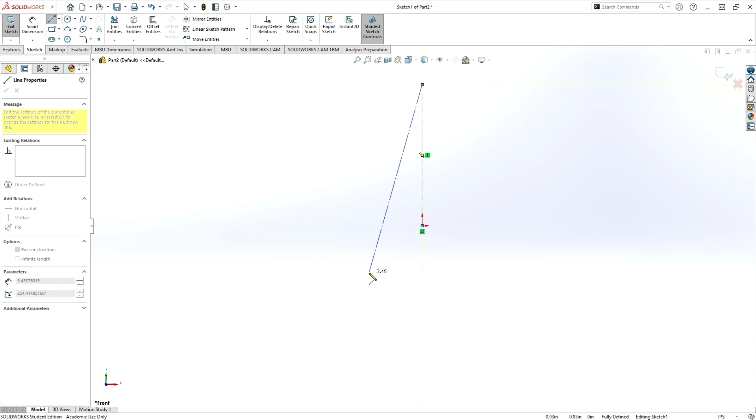And we're going to create a center line since we're doing a revolve. Okay, up. And I'm going to select on that center line and I'm going to make it infinite length. Now I'm going to start drawing my shape. So I start at origin so I can anchor it. Go to the left, up, angle, up, back to center line, and then back to origin. I now have the basic shape.

Alright, we know that this is a 45-degree angle. So let's go ahead and constrain that at 45 degrees. Okay, so any dimensions we apply on it, at least that dimension's already configured. Alright, let's go back to our drawing. What are we going to do next? So we need diameters and overall height. Let's do the overall height first. That'll get it proportionally. So it is 430 thousandths to 2 decimal points.

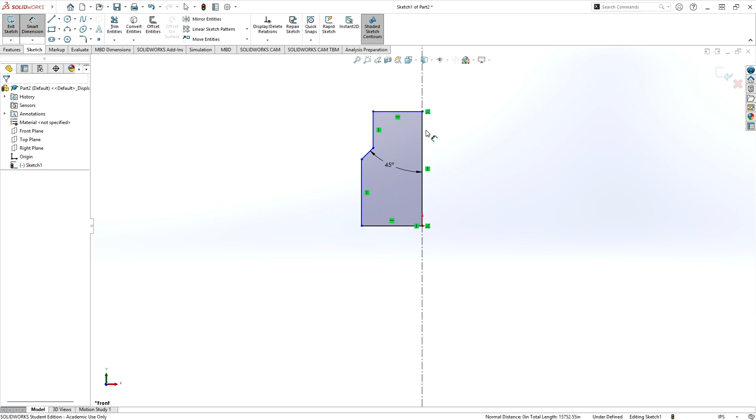So we're going to take our dimension tool, we're going to grab our line. Hit OK on the previous dimension. We're going to hit our vertical line. Let's hit escape. Let's try that again. And we get our vertical line, pull over, and it's 0.43. Okay, now in my case, I ended up drawing my part much taller than 0.43, so not a problem. This is still constrained at 45.

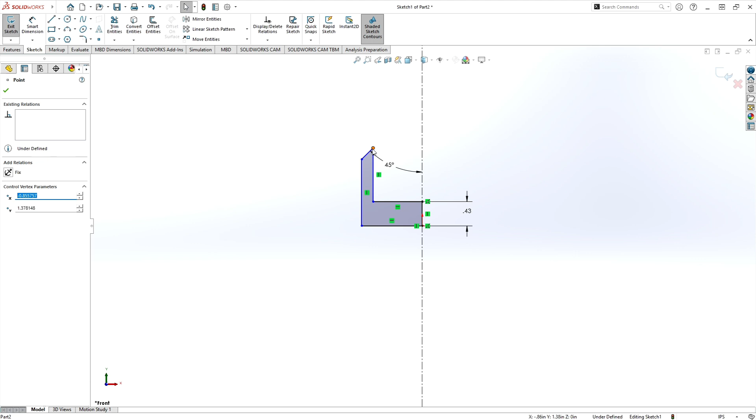You might or might not have this happen, but I'm going to drag this 45 down so that it's at the right height. Now when we start applying the other heights on it, it'll correct itself. Okay, so in our diameters. Okay, so let's stick with heights. I'm going to go to the next height. We've got 130 thousandths from the top down to the top of the chamfer.

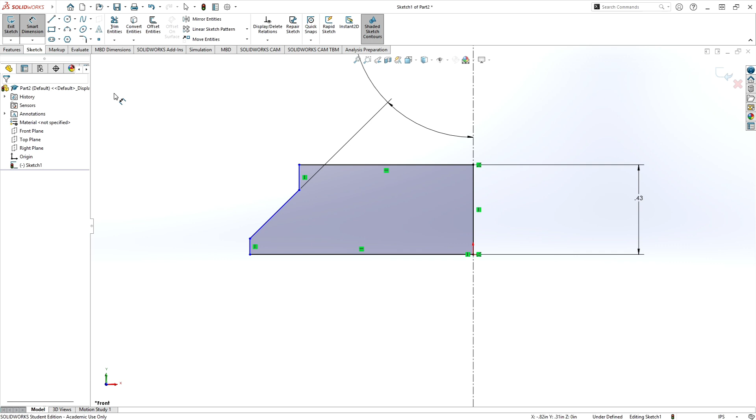Okay, so we're going to go to dimension. We're going to grab the length we want, and it's 0.13. It's actually pretty close. What is really off right now is our diameters. Okay, we have diameters to put in. Okay, so our first diameter, if we go back to our drawing, is 194 to 197.

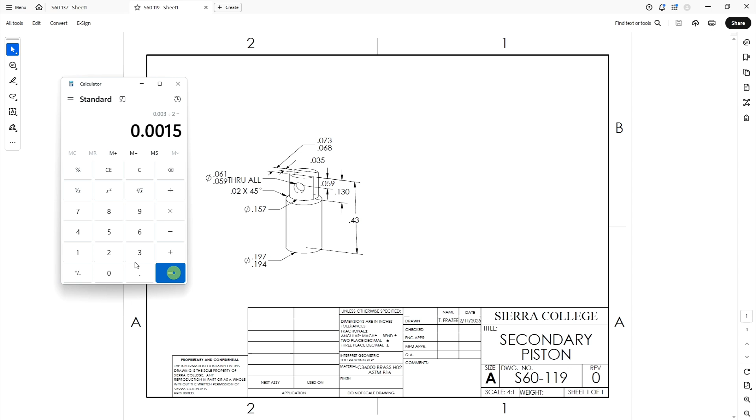Okay, so again, to get that number, we're going to go to our handy calculator, and we're going to put in 0.197, and we're going to subtract 0.194, and that's going to give us the range of our tolerance, 3 thousandths. We're going to divide that by 2. So we have a 1.5 thou difference between the bottom and the top of this tolerance.

We're going to add it to the bottom of the tolerance, which is 0.194, and it gives us this number, 0.1955, or 195 and 5/10 thousandths. We're going to copy that number. We're going to go back to SolidWorks.

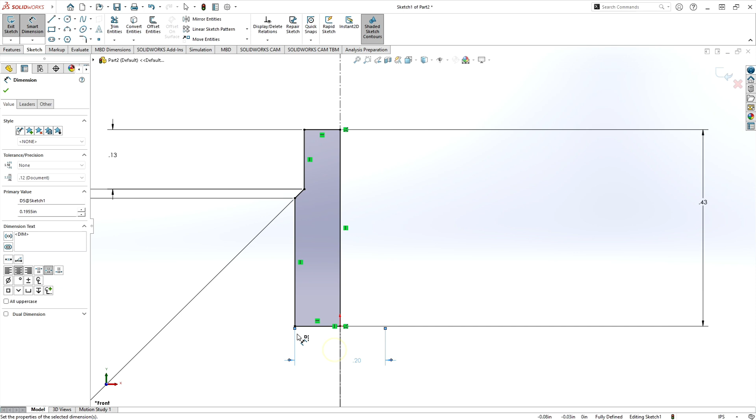We're going to go and do a dimension from center line, not from the line, from center line to the outside diameter, and when we drag it to the right of the center line, we should get a diameter, and we can paste that number in there. Now, this might shrink a lot, so let's hit OK. Okay, and now we're going to do our other diameter.

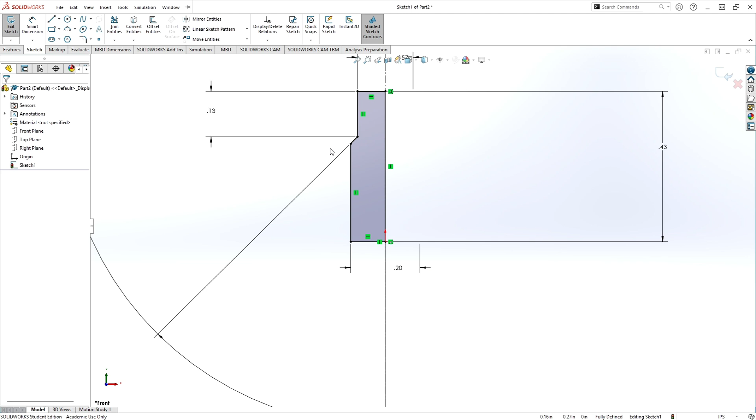It's going to be the small one to the center line, drag to the right. It's 0.157. Hit enter, and we want to make sure we go to 3 decimal points in there. Now your drawing references a distance from this point to this point of 20 thousandths. It's within the tolerance stack. This tighter tolerance is more important. So you might get a conflict if you try to dimension both. So the drawing really should have the 20 thousandths as a reference and just put the angle on there.

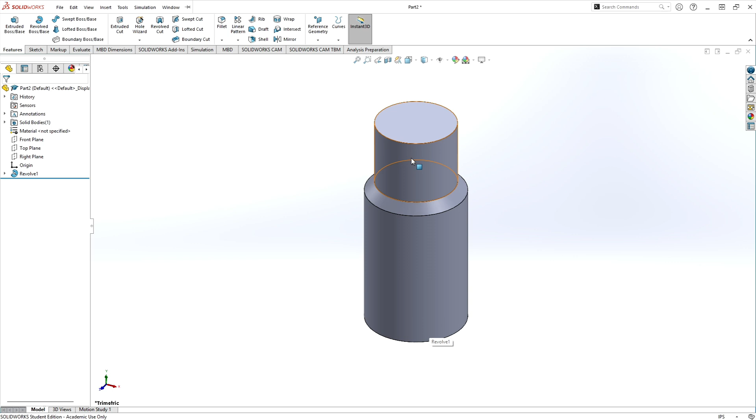All right, we're going to exit this sketch, and then we're going to go to features, and we're going to do a revolve base. There's our primary feature that we're starting with, and we hit OK. And again, I don't care how you arrive at this. If you want to extrude a cylinder, do a taper, then extrude another cylinder, as long as the end result's the same. Okay, now let's look at our drawing. We have a hole and a notch to put in. Let's put in the notch first.

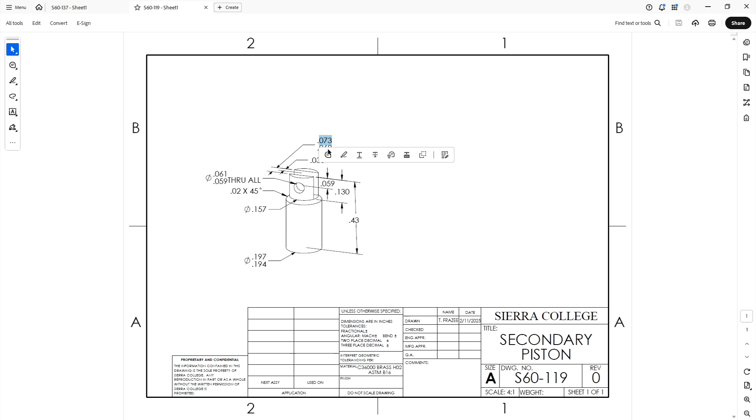So if we look at the dimensions for the notch, it's got a center line, so you don't want to imply it's on center line unless it's called out that way. So it's 35 thousandths, and then the median of the tolerance should be also 35 thousandths, or it should be 70 thousandths in between here and here. So let's go draw our slot. There's a couple ways you can approach this.

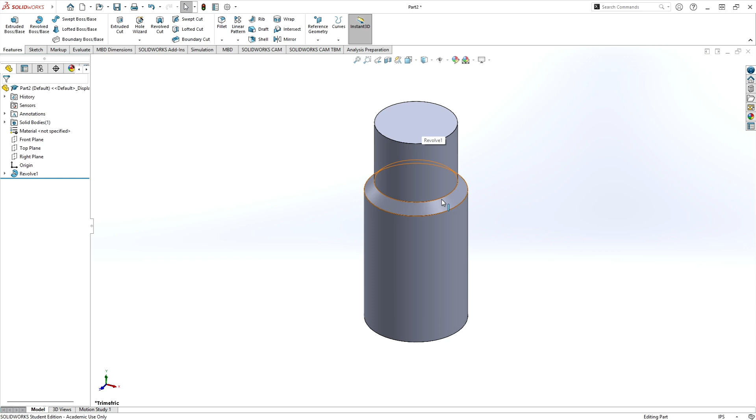You can either draw the slot on the top and cut down to the cylinder, or you can cut it in the side view and cut it in both directions. I'm going to draw it from the top. We're going to go to sketch. We're going to pick on the sketch tool. We're going to pick on the top of the model, that's what we're drawing on. Now we're going to draw a line.

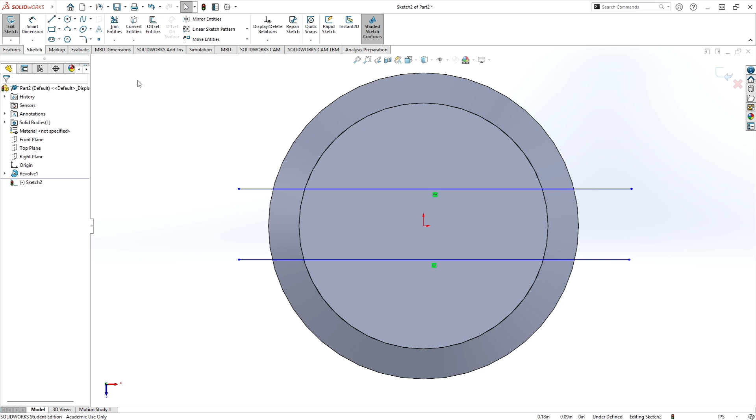Okay, and then we're going to hit escape, and then we're going to draw another line parallel to that. If you get the relationship right, the horizontal should already be there. And then we're going to do what's called a convert entities. This allows us to pick on an edge of the part and project it on the plane we're working on. So I've now got the edge projected on the plane I'm working on.

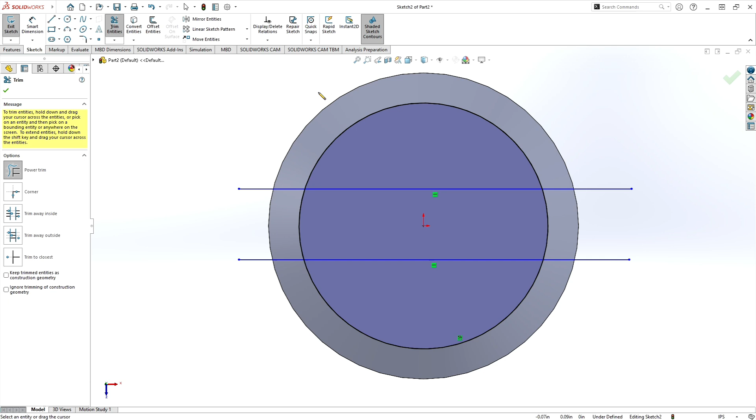Now we can go to trim entities, and we're going to use the power trim. You pick in space, you click and hold, and then you drag this theoretical line across the stuff you want to go away. Boom. Okay. I'm left with 2 lines terminated with arcs on the ends. Okay. Now we need to dimension this.

So from center line, from origin to this line, we had 0.035, 35 thou. And we want to bump that up to 3 decimals so it doesn't round up to 4. And then our width of the slot is double that. Okay, so 0.07. And we're going to go to 3 decimal points on that as well. And we're going to put in a limit dimension.

And our limit was 73 to 68. So it looks like it's plus or minus 3 thou. Or 2.5 thou, actually. It's rounding. Okay, so 0.0025, and it automatically goes to 4 decimals when you do that. You're going to go back to 3, and you should get the range that was on there. We'll center that dimension. Hit OK. Everything should be constrained in this sketch now because these lines are automatically aligned to what they were projected from.

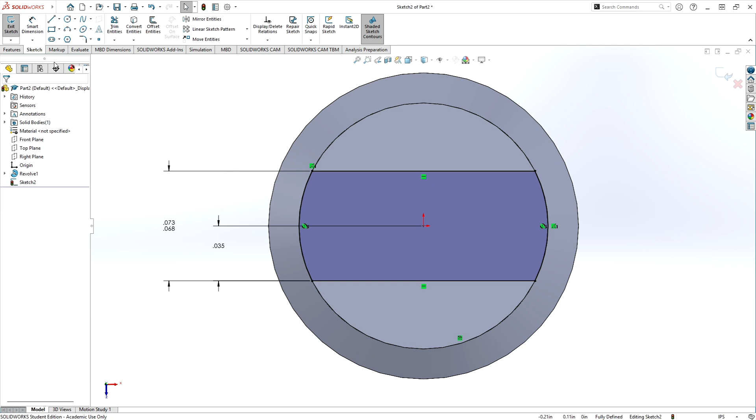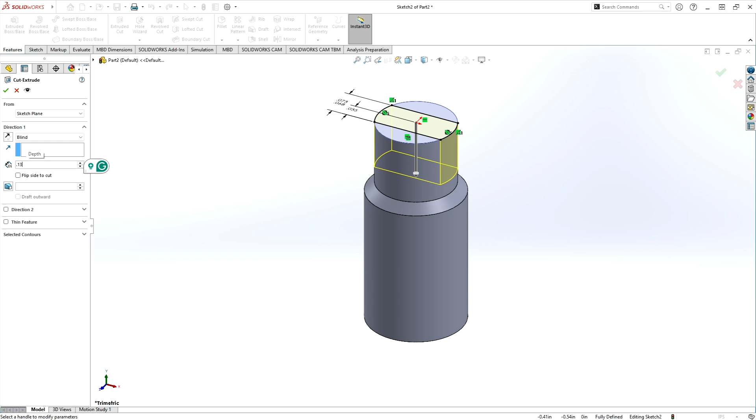So now we're going to go to features, and we're going to do an extruded cut. We're going to go blind, and our height according to our drawing was 130 thousandths. Okay, that gives us our slot where we want it.

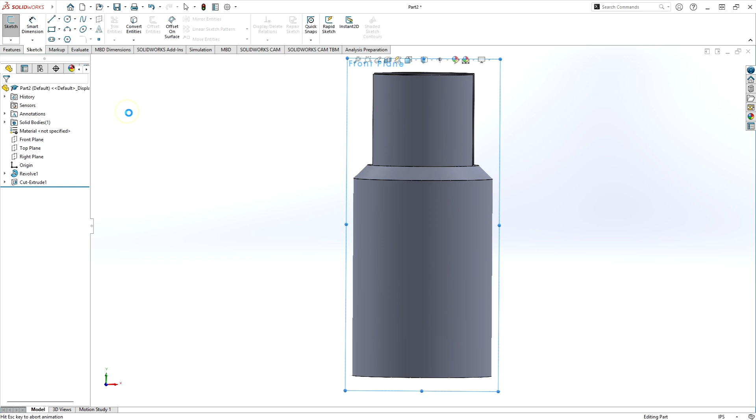Okay, next we're going to make the hole. This one's going to be done a little different. We're going to do a sketch. If we built our model on centerline, I'm going to actually sketch on the front plane, which is right in the middle of our part. And then we're going to place a circle. We're going to pick the center of that circle, hold the shift key down and pick origin, and we want it vertically aligned with origin.

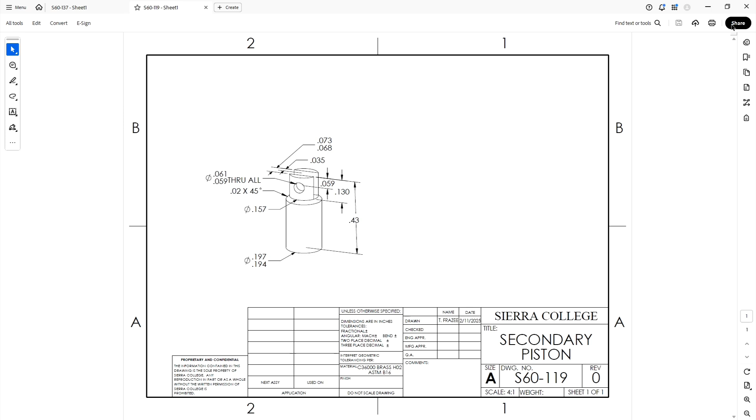Okay. Now we need a dimension for the diameter and for its location and z height. So if we look at our drawing, it is 59 thousandths from the top. So pick the top of the model, pick the center of your circle, drag to the right, 0.059, hit OK, change to 3 place decimals, center your dimension. Okay, we've got that controlled. Now we just need a diameter.

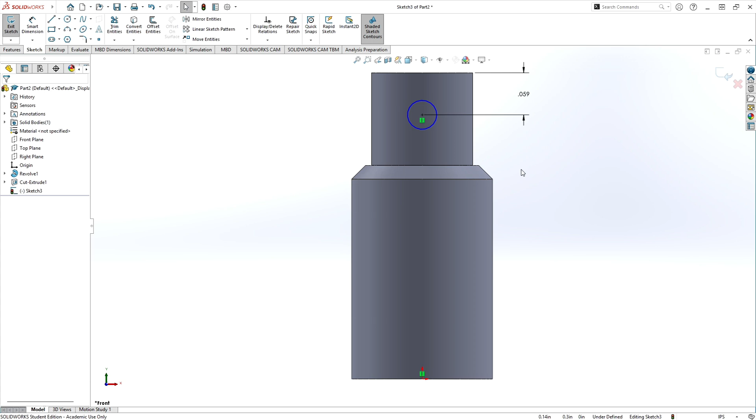Our diameter was a 59 to 61 through, so our nominal is 60. We're going to do a dimension on the circle, call it 60. We're going to go to 3 place decimals. We're going to do a limit tolerance, and it's plus or minus 1. Oh, or 0.001.

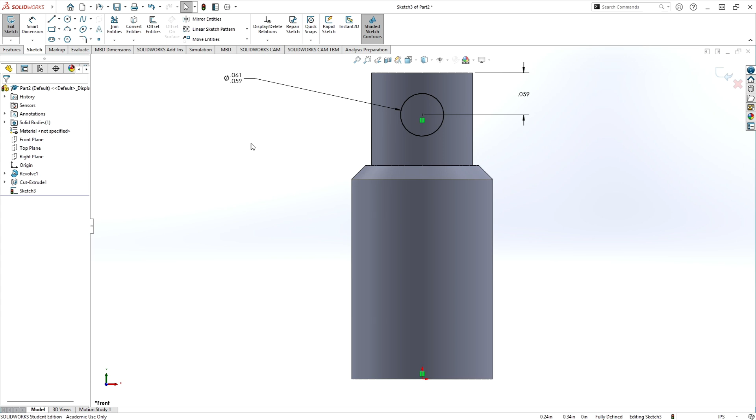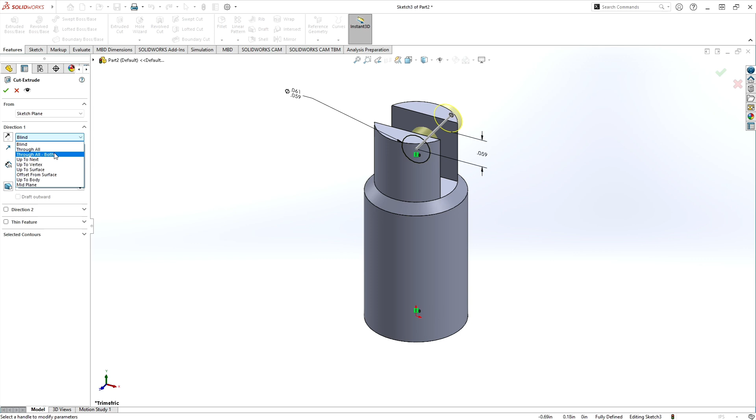Okay, so I'm going to rotate so you can see what we're doing. We're drawing on a theoretical plane in the center of the part. We were looking straight in on it. Now we can go to features and we do an extruded cut. It's going to default to doing blind in one direction. What we want to do is go through all both, and it'll do it in both directions to infinity and beyond. And there we go. We have our holes in our part.

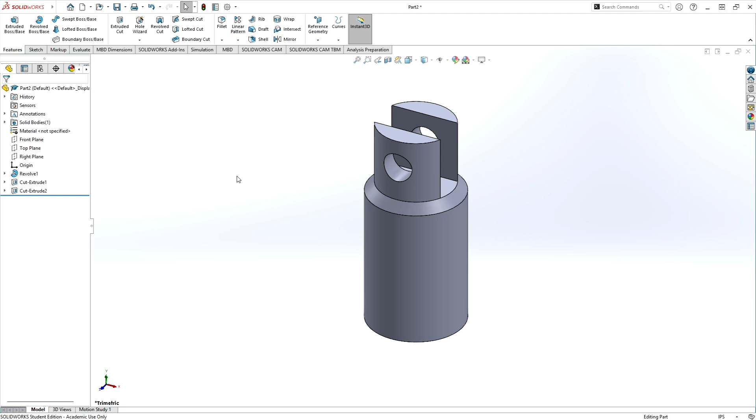Alright, that concludes making this part using 3 features, a revolve and 2 cuts. Don't forget to change your material to brass. Don't forget to go to your options and fill out all your information here. Also, before you turn it in, check that all your sketches are constrained. If they're not, they'll have a little negative symbol here next to it, and there's something wrong. If you want to get full credit, that's all got to be correct.